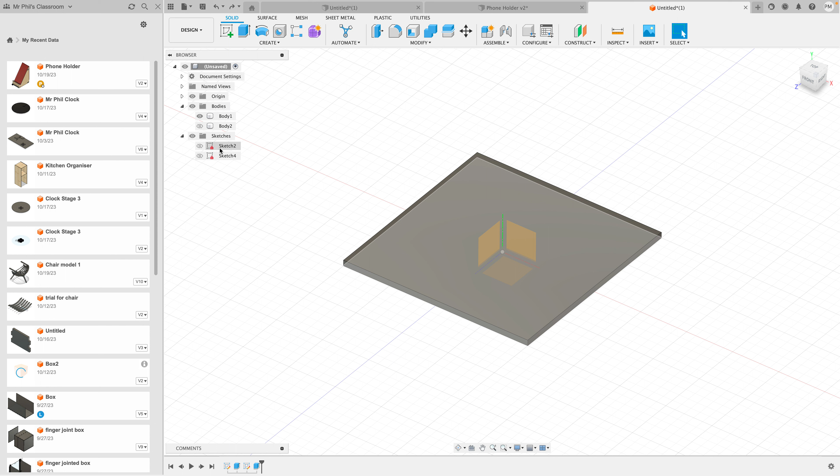This is where we started off here. I was actually just thinking, Dennis, what I'm going to do is, this is not ideal because in my sketch, these I just typed in 100. And really what we want to do is we want to make sure that we have parameters that we set. So that way we have fixed parts of our design that we can change, and if we change them, everything else will change.

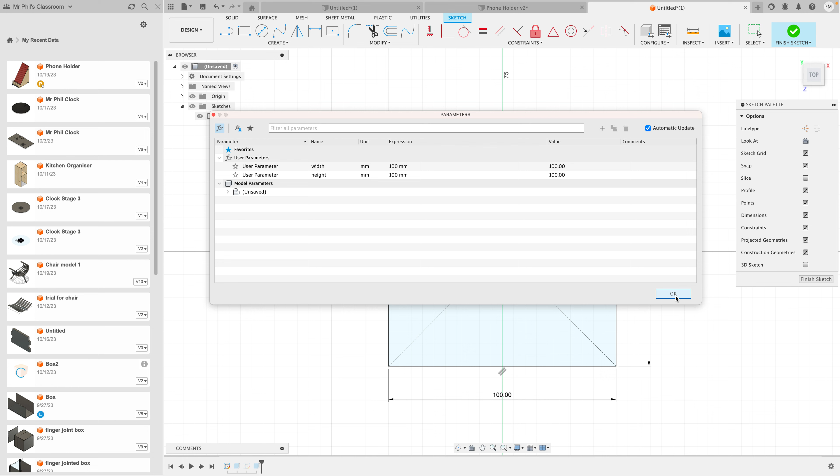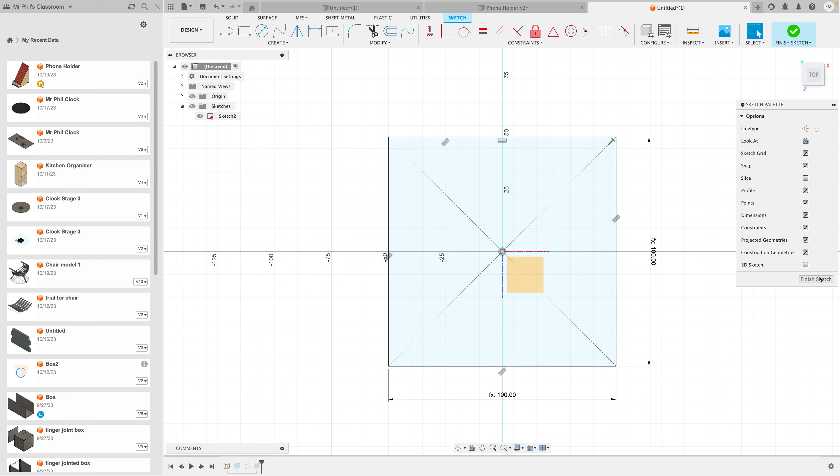So I'm going to set the width to 100, and I'm going to set the height to 100, and go OK. So now instead of this, I'm going to click on here, and if I put in W, width comes up right away. And here, I'm going to make this height. Actually, I should have called that, I'll call it height for now.

Okay. So now what I'm going to do is I'm going to open up my new sketch here that I started before. The sketch is on the side here. I'm going to extrude it. So I'm going to go E, which is the keyboard shortcut for extrude. Going to select this, and I want to extrude it.

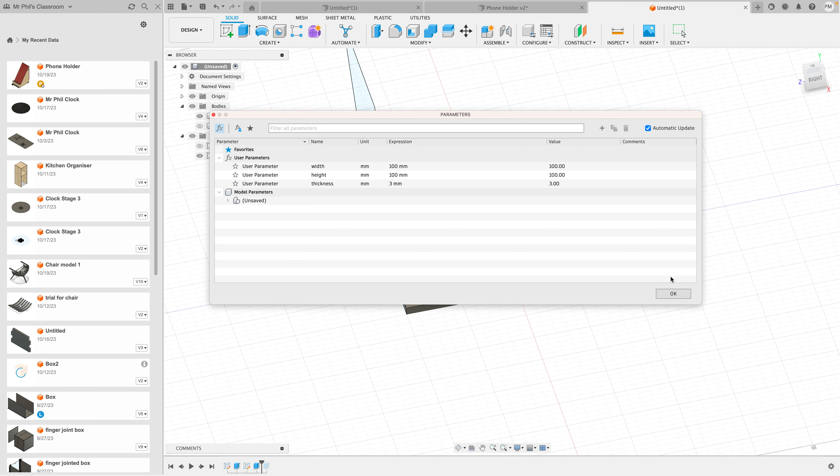Now, what I really want to do is I should actually have another parameter here called thickness. And I'm going to make that 3. So if I extrude this now, I'm going to type T, and I'm going to put in thickness.

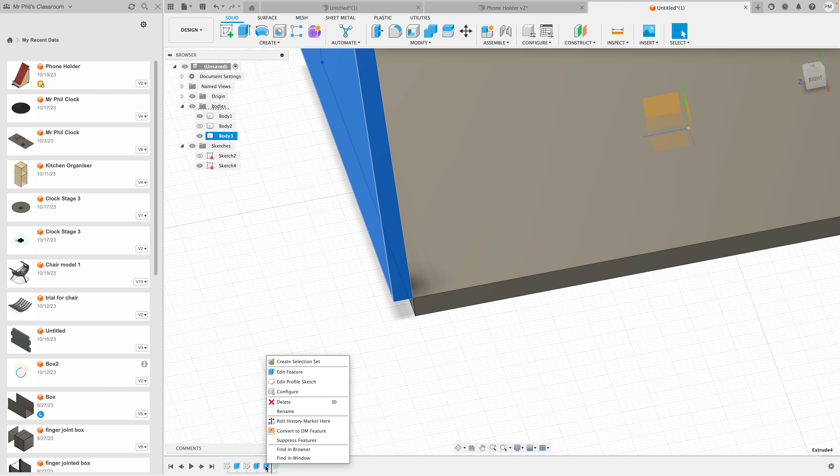And now you can see here, there's a gap, and that's because when I extruded, I forgot to select this part. So you can always go back down here to your timeline, go Edit Feature, and then go back up here, and now you'll notice I can't see this part. Why can't I? There we go. So now I've selected that part, the whole thing is selected.

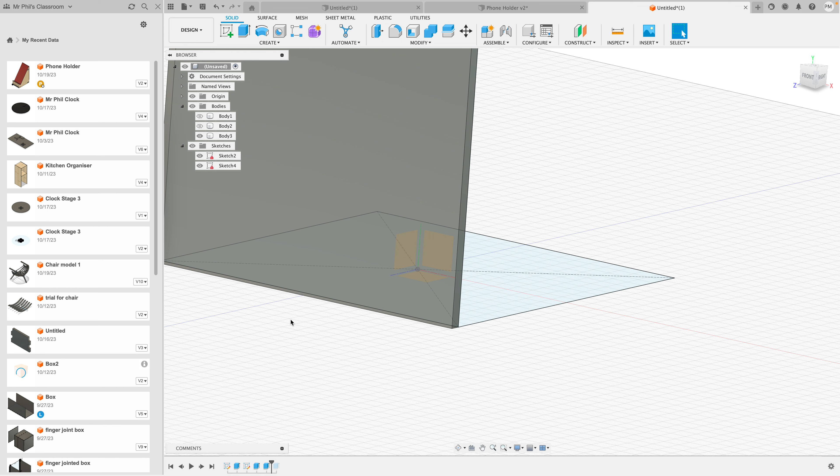Okay, so to make my finger joints, I'm actually going to hide this bottom body piece here. And I'm going to do a new sketch on here. And the first thing I have to do is draw a line across here, which is going to be the depth that I want the finger joints to be, right? So I want this to be the same depth as the thickness of the base.

So I'm going to click D, which is the keyboard shortcut for distance or dimensions. And I could type 3, but I actually want this to be the same height as the thickness. So I'm just going to type T and put in thickness. So now I know that's going to be the same thickness as the base. And now I get to put in a bunch of vertical lines for my finger joints.

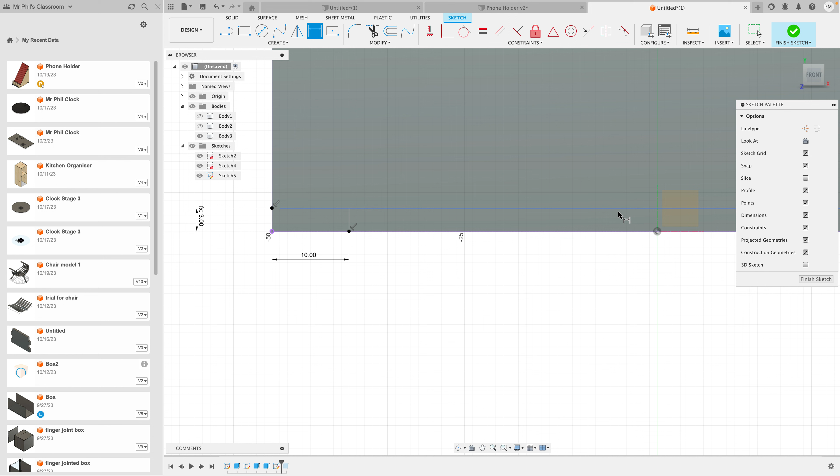So I'm going to put in one line like that. And now I need to make sure, you see it's blue, which means that it isn't defined yet. Fusion doesn't know where it is. It's not attached to any existing geometry. So I'm going to click D, and I'm going to click on that line and the edge here. Come on, edge. And I'm going to make that 10 millimeters or 1 centimeter away from the edge. Okay? So now I need to make more of those.

So the quickest way to do that is to use the rectangular pattern tool. So I'm going to select this tool. I'm going to drag this over. And you can see here, right now I've got 3 lines I'm making a copy of. So I want to have more than that. So 5, 6, 7. So if I drag this out now, and I think if I've got 9 lines, and I drag this over to here,

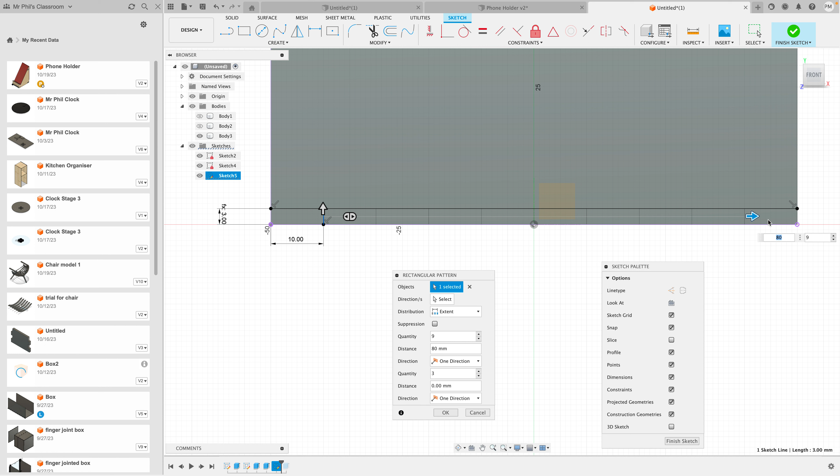that should give me 1, 2, 3, 4, 5, 6, 7, 8, 9, 10 sections, each which is 10 millimeters, right? So I'm going to go OK and finish sketch. So now I've got separate sections that I can use to make my fingers.

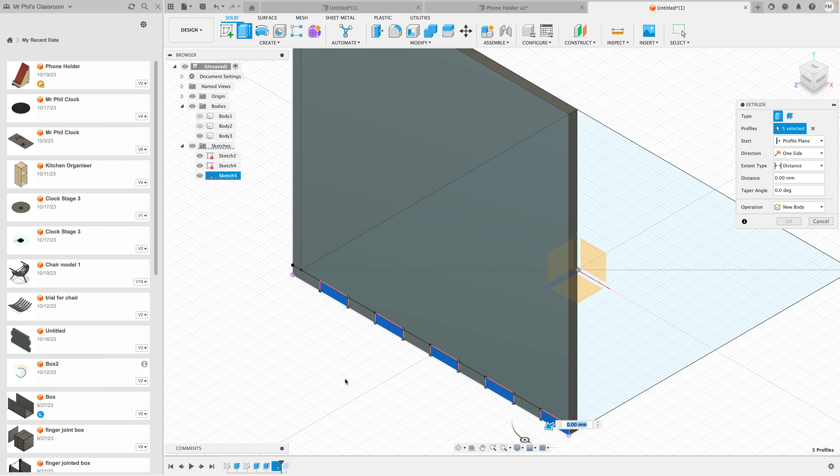So now I'm going to go over here and get my extrude tool, and I'm going to select all of the parts I'm going to cut out, but I want to go this direction to cut them out.

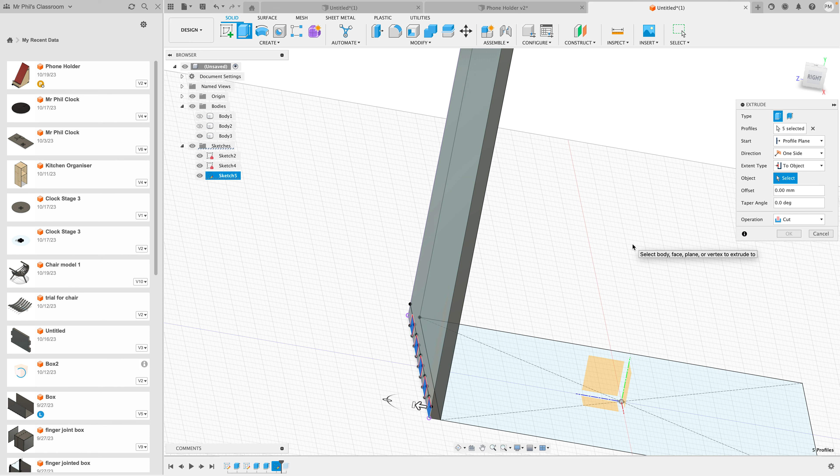And so when you're doing an extrude, you've got a number of different options, right? So I can do distance, so this is the distance I tell it to go, or I can go to object. So if I click on to object, then I click on this back face, it will cut it out even with that face. So now I have made my first finger joints.

Okay, so now I'm going to turn my other body back on here. Oh, what did I do here? So I need to go figure out what I did. I think when I did my extrude, the distance should have been minus thickness. Okay, so now I'm going to have to do that again, I think.

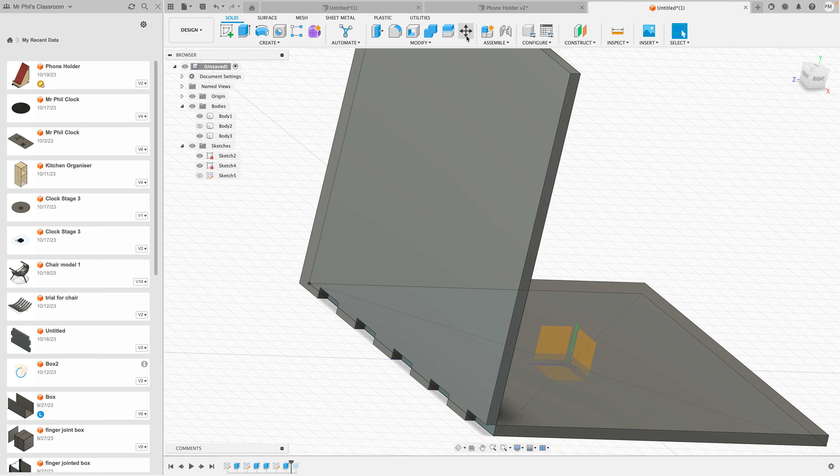All right, what we're going to do is we're going to go thickness. Right, so I should have done it minus thickness, but I didn't. So what we're going to do is we're going to turn off this, and we're going to use the move tool. And I'm just going to do a little cheat here. I'm just going to move this over so it's lined up. Okay, so now what I need to do is I'm going to use this shape to cut this bottom shape.

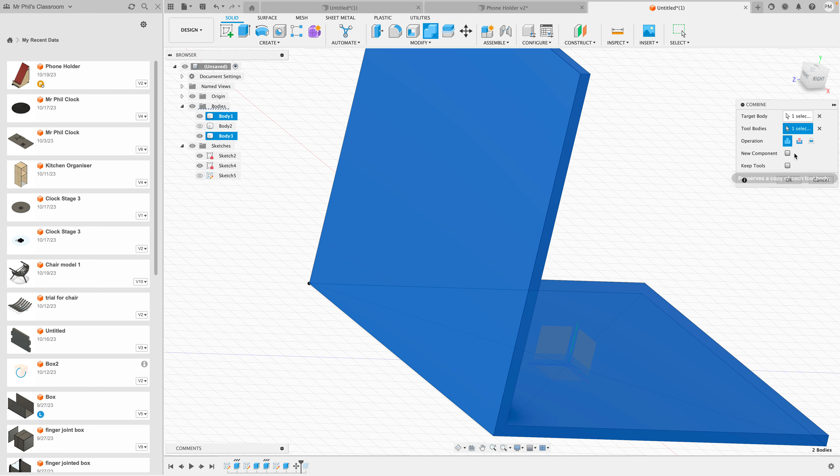So I'm going to use the combine tool. So the first thing I want to do is the target body. That's the one that's going to be cut. Then I'm going to click on the tool body. That's the one that's going to be used to do the cutting. And what I want to make sure is I click on cut. And now I want to also make sure I click on keep tools so that the tool doesn't go away. And now I'm going to click OK.

And so what you'll notice now is it's now cut the opposite shape out of that. Right? So now I've basically got my finger joints. Okay? You can use the same technique. I'm just going to do another sketch on here for a minute. So if you've got a shelf that you want to put on, I'm just going to go and draw a, so we're going to make this thickness wide.

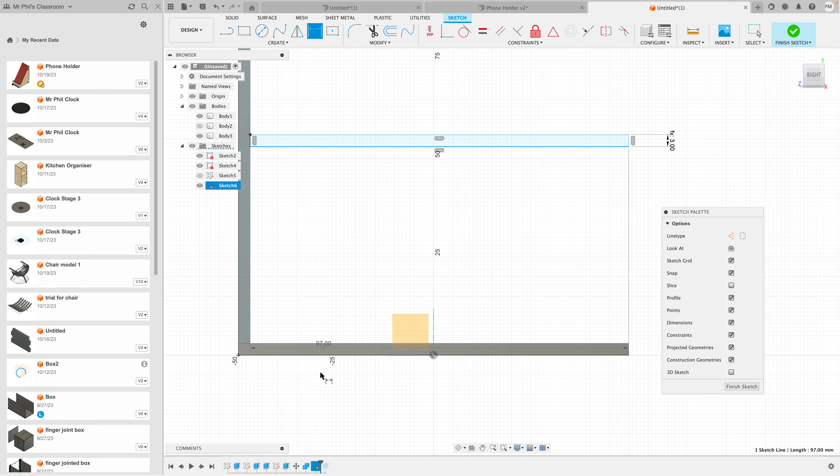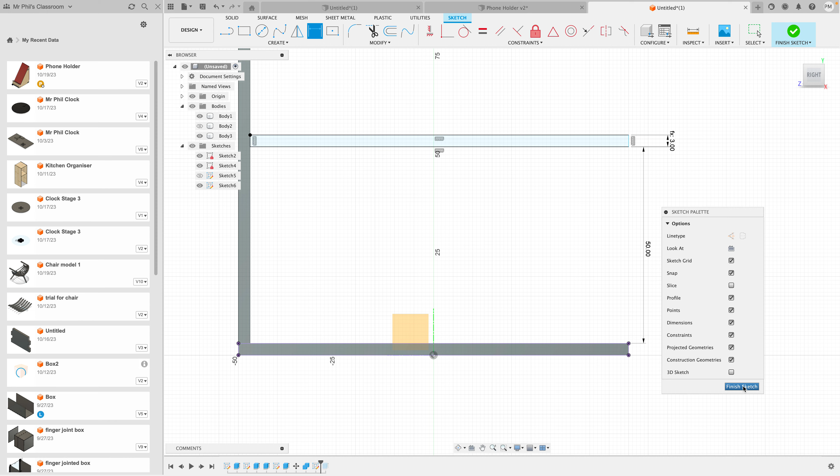And so this is blue because it doesn't know where it is, so I'm going to tell Fusion that it's going to be, now you'll notice here I can't get it to click on here, so that means I need to click P and project it first. So now if I click D, I should be able to make that 50. So now it's gone black. So I'm going to go finish sketch, and we're going to just quickly extrude this over, and we're going to make this minus, I think it's the height. Where's the parameter?

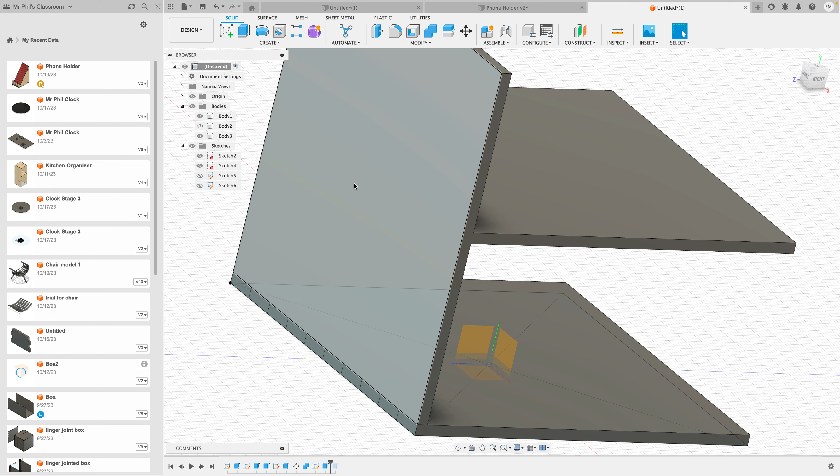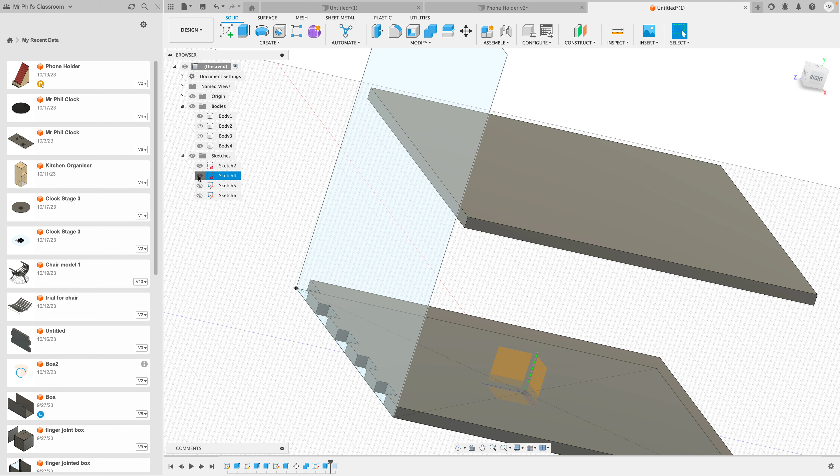Okay, so some of you may also want to make like a, I think I got to go back in here, and I accidentally made that join, so I'm going to make that a new body. Okay, so you can use the same technique we use to make the finger joints to make like a slot here for this shelf to fit in. So what I'm going to do first is hide this body here and turn off that sketch.

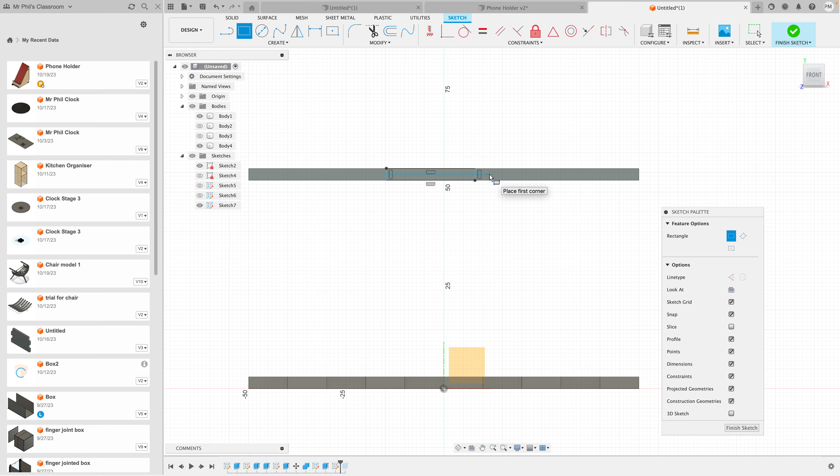So I want a new sketch on here, and what I'm going to do is I'm going to make a piece there that I'm going to get to stick out. Now, this is not centered, so I want to center it. What I want to do is just show you how you can use it to cut. So I'm going to be a little lazy here and not center that right now.

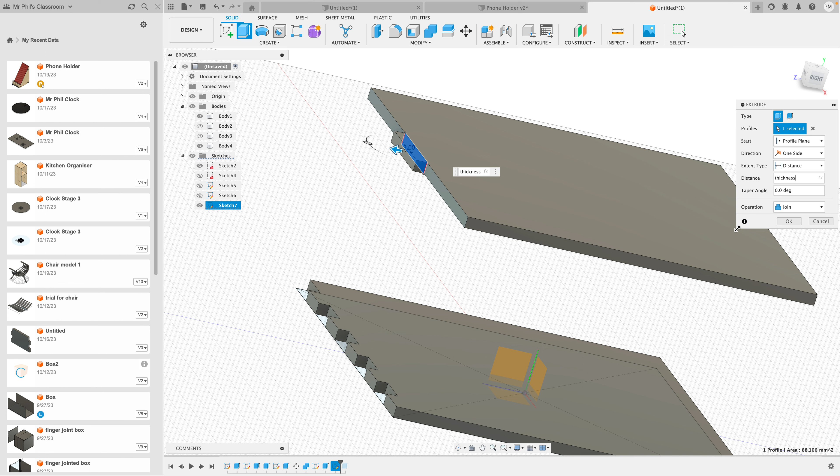But we can now extrude this out, right? We want to extrude it out a distance of thickness, because that's going to be the distance. And we want to join it to this shelf. So now I've added a piece sticking out of there. So now what I can do is I can turn this back on and I can combine them.

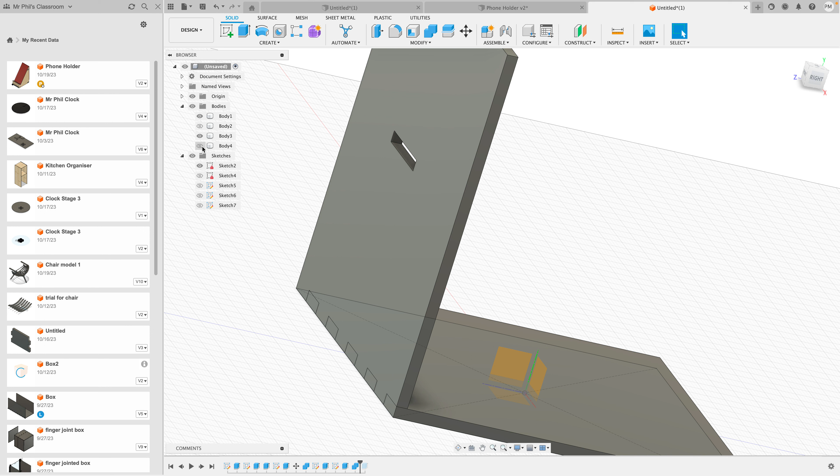So this is going to now be my target body. This is going to be my tool body. I click OK, and I've now cut that hole out there, right? So that's kind of how you use those tools to build your finger joints and your slots on your shape. So I'm